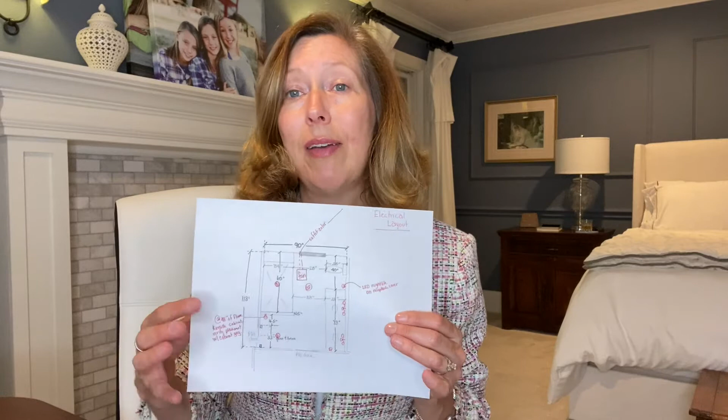I photocopied it so that I have it black and white, and then I took a red marker and I started laying out where I wanted the electric on it. So I'm going to show you this and talk to you more about it so that when you get ready to do your own bathroom remodel, you'll have some things in mind that you maybe want to incorporate or not incorporate. The nice thing about this is twofold, or actually threefold, really.

First, when you want to get a bid from an electrician, you can give them this and they can legitimately give you a bid off of it. They probably do need to see the proximity of the bathroom from your electrical box and what kind of shape your electrical box is in, especially if you're going to add any circuits. But this helps in getting you a more concrete bid for your job.

It also lets them know when they get there and start working exactly what they need to do, so they're not frustrated and they can work much faster. And in the end, it guarantees you what you want. If you don't have something like this, an electrician shows up at your house, they're either going to ask you a million questions or they're going to make decisions for you. They're going to decide where your light fixtures go, where your outlets go, and things of that nature. So if you've thought about it beforehand and you have a strong idea of where you want these things, then something like this is really invaluable to you.

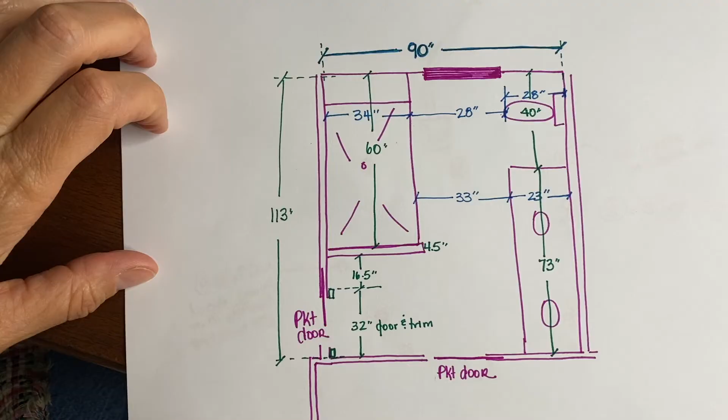So I'm going to pull the camera over my shoulder and show you in great detail so that we can talk about it all. Last week when I talked about how to lay out a bathroom, this is the sketch that we were left with at the end of that exercise. I had drawn out the bathroom, I had placed the vanity, the toilet, and the shower, and talked about having some storage here and the fact that I wanted 2 pocket doors. This one from the master bedroom and this one from the hallway.

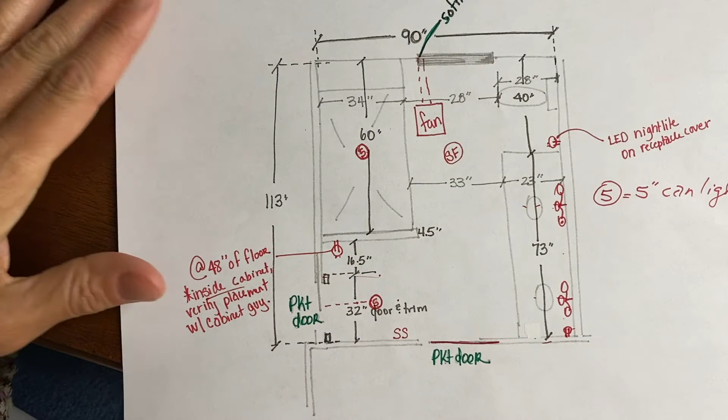So now that I have this, what I do is I take it and I make a black and white photocopy of it. So then I'm left with this. And what I like about this is that the bathroom itself is there, but it sort of fades into the background. And then I use a red marker, and I will also link these in my blog because I love these. They're a medium tip. I can draw some fine information on here, but it doesn't overwhelm.

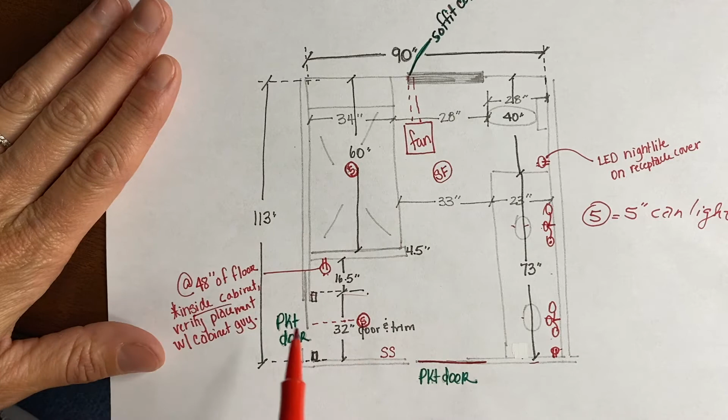But then what I start doing is I take my red marker and I draw my electrical layout. And I really like to think about all the electric, the switches, the receptacles, some people call those outlets or plugs, and the actual lighting. And I draw all of this on here for my electrician. I also put on where there's any pocket doors because electricians have to know about pocket doors. They cannot put any electric switches, outlets, lights, anything on the wall on either side of where there's a pocket door. So it's very important to keep those in mind.

So let's just start with the receptacles. Because there's a pocket door here, I know that I can't put any switches or a receptacle in this space. I should have a few inches here at the very back corner of this vanity where I can snug in a receptacle.

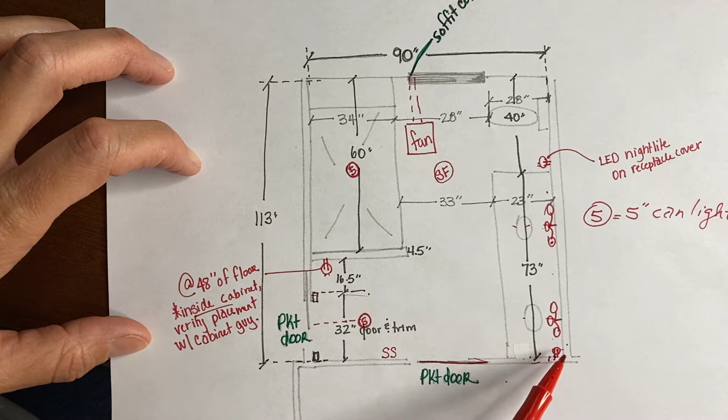The reason that I don't want to put it on this wall is because if we do a big mirror from side to side, which I am a fan of, I don't want the receptacle to interfere with that. So I'm going to tuck it over on the side. I also want one for the person that has this sink, and I'm going to go just off the edge of the vanity and drop it in.

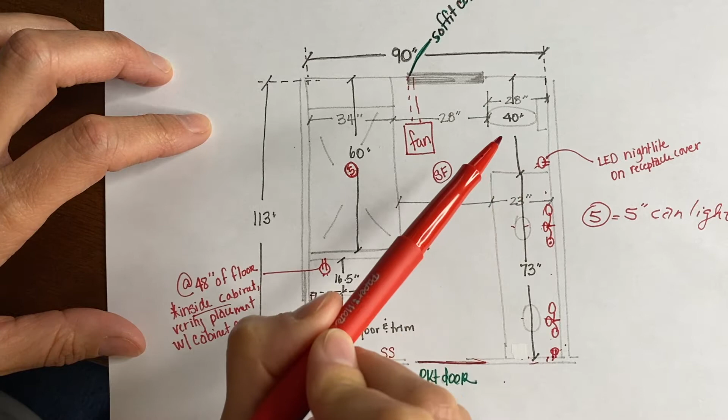And you'll see my notes over here. I have LED nightlight on receptacle cover. So I'm going to link these in the blog also, but I can buy off of Amazon receptacle covers that have a very tiny little photo cell in the corner, and at night when it gets dark it makes an LED light shine out the bottom of the receptacle, and it just gives you a little pool of light here, but it makes it really nice for those nocturnal trips to the restroom. Okay, so that's where those 2 receptacles are going.

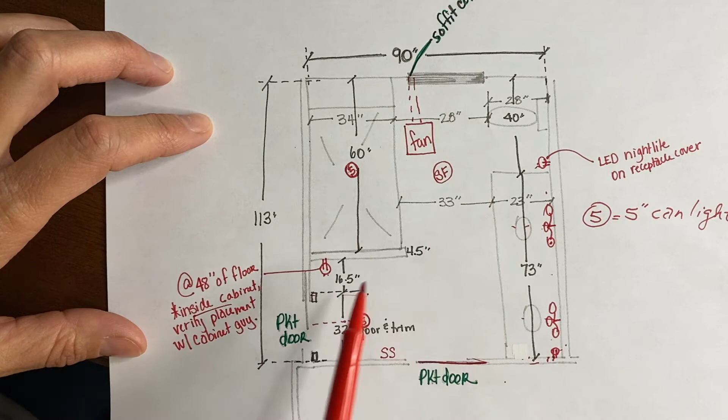The only other place I would put a receptacle in this particular bathroom is actually in this cabinet. I feel like that might be a good place for phones to get charged at night, or charging your toothbrushes if you don't like to leave them out on the counter, or an electric razor. So I'm actually going to install a receptacle inside of this cabinet, and I believe that I want it 48 inches off of the floor.

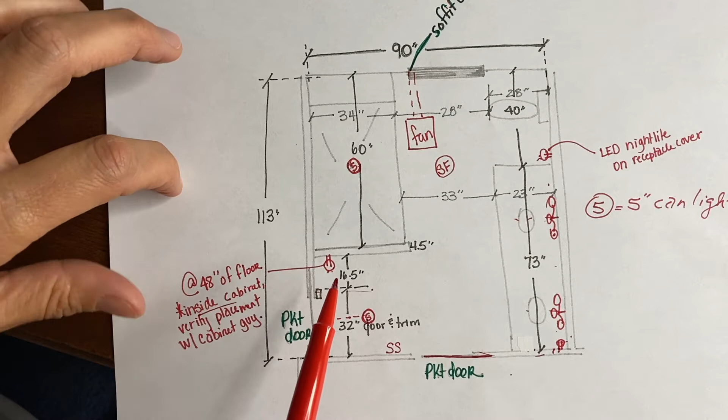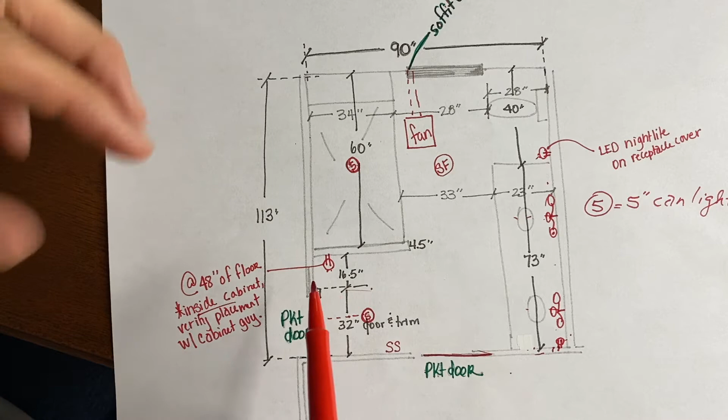I'm going to verify that with my cabinet maker, but it always helps to tell the electrician, because if you just tell them you want a receptacle here, they don't know your grand plan. They don't know that you're going to have a cabinet here and that you want a shelf up high. They're going to drop that down next to the floor where they typically put one, and that's not going to be handy for you. So think through things like that and decide where you want it, but it's nice to tell them how many inches you want it off the floor.

For the lights over the vanity, I also tell them how many inches I want those installed off of the floor. It depends on the height of my ceiling and the height of my mirror and so forth. But there are some standards for that, and I did not pull that up, but I think it's like 67 inches off the floor, but I'll put that in the blog to be sure.

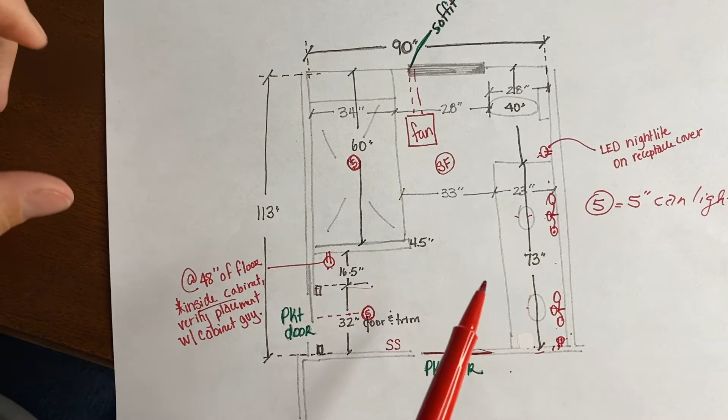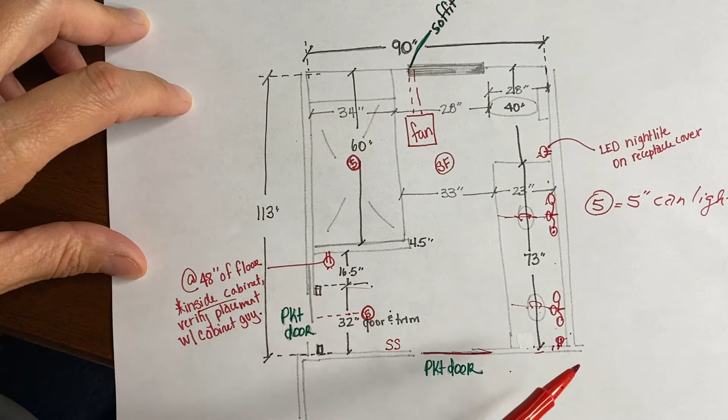So what I am telling the electrician is that I'm going to put up a 3-bulb fixture and that I want it centered on the sink. And you can denote that by drawing a line and putting a C there, and that means in the industry that you want something centered. I've also chosen, wait a minute, let me jump back on the receptacles. So I'm only putting those 3 in the bathroom. That's typically all you need.

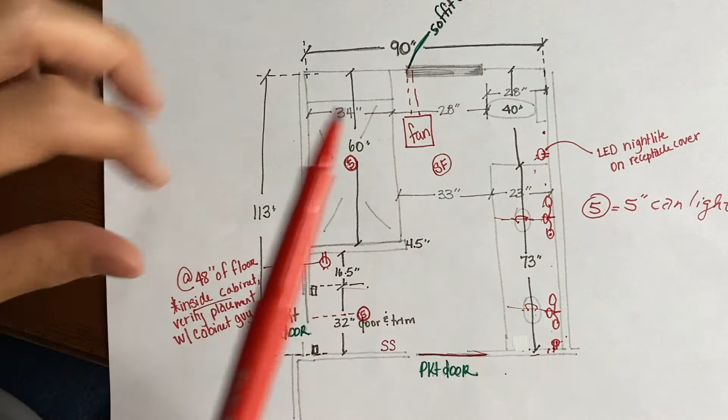However, if you think you might want a bidet, you're going to have to find out about the electric on it. There may need to be a receptacle here. And what I want to say about that is, if you think you're going to do a bidet, you need to know that now, and you need to pick out the one you're going to get now, because it could matter. It could need to be a plug on this side or this side. So you want to get that stuff right early. That's why I'm such a big proponent of planning.

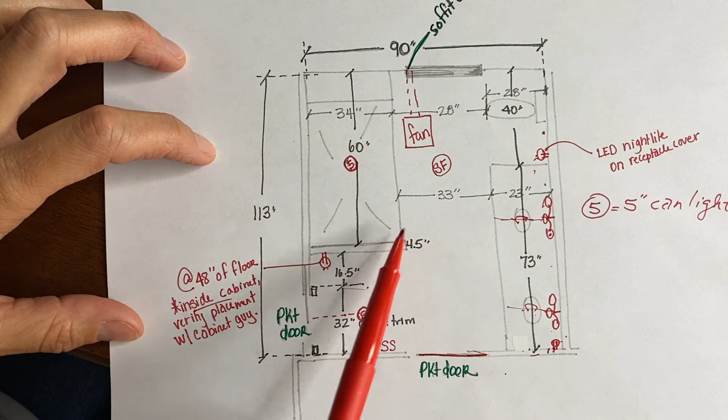Let's see, so I've covered these receptacles, I've covered these lights, can lights. So I really like can lights, I'm a fan of those. I always like to drop one over the shower. Even though the whole front wall of this is glass and you have all of this nice light out here, I still think it's nice for cleaning and for when this gets steamed up, just to have that extra light in the shower. It can't hurt anything, and if you want something like that, this is the time to do it. So I just usually drop one right in the middle of the shower.

And then this little space over here, I feel like could be kind of dark, and where I'm going to have a cabinet here, I want to be able to see in that, so I'm going to drop one can light centered up on this door. That's what this dotted line means, that I wanted this 5-inch can light centered up on this doorway. Also, I have worked with my electrician for a long time, so when I do a 5 with a circle around it, he knows that means I want a 5-inch can there.

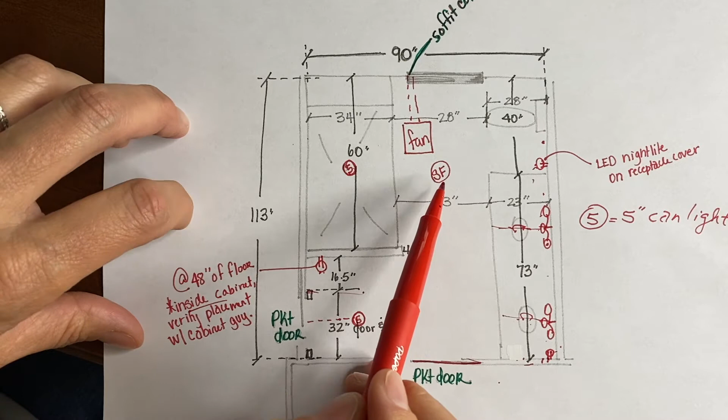But if you're working with somebody that you've never worked with before, they may not get your key, so just do them a little key over here on the side. Do a 5 with a circle and say 5-inch can light. This, for instance, is a semi-flush light that I'd like to have in the ceiling of the bathroom. So I would do an SF with a circle, and I would put an equal mark, and I would say semi-flush, and then your electrician will know exactly what you're talking about.

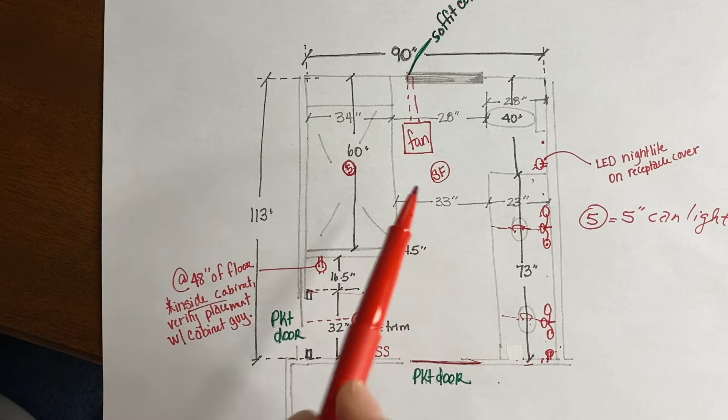And a semi-flush light is one that is very close to the ceiling. It hangs down maybe 6 inches. I don't want to go any further than that in here because they have an 8-foot ceiling, so like a chandelier would not be appropriate. You could also do a flush mount. That would be perfectly fine also. Just depends on what I find when I start shopping for that.

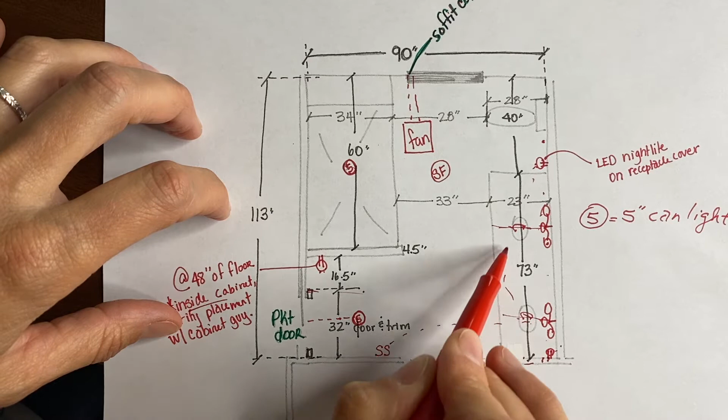Let's see, the last thing that I want to do on here is my switches. So I feel like there needs to be 2 switches in this bathroom. There needs to be one that turns these 2 lights on. So what I would do is I would draw a dotted line to this one, and then to this one. And then this switch, I think, can turn on this can light, and this. I think it's fine for all 3 of those to be on at once.

I mean, you could divide them all up on separate switches, but then what you would get is a whole bunch of switches stacked across here. And if you're like me, you're never going to remember which switch turns on which light, so you have to stand and flip them all on and off. And that's just annoying. Just keep it simple, I think, and just make all of these on one switch.

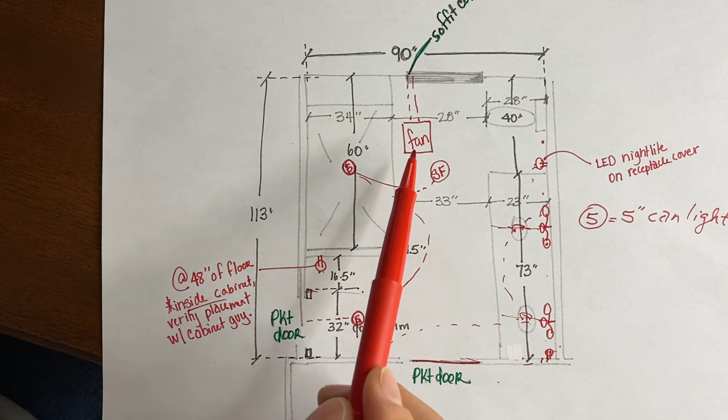My bath fans, I do not put on a switch. I buy the kind that have a humidistat in them and that are sensing, and so they just come on and off as needed. And I can also link to those in the blog post.

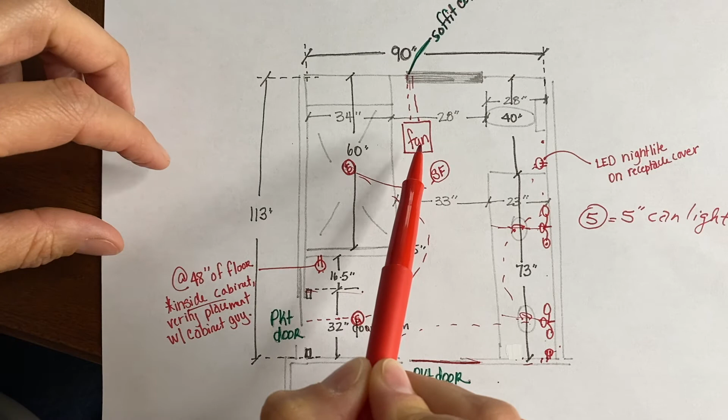And the thing I want you to know about the fan is that the electrician hangs it and wires it, and then the HVAC contractor runs your ventilation from it to the outside. You just want to give them a location of your fan, a general idea of where you want it, because when they actually go in there, there could be a joist running through the middle of this and they need to shift it one way or the other. So those are some things that are important to remember when you're laying this out.

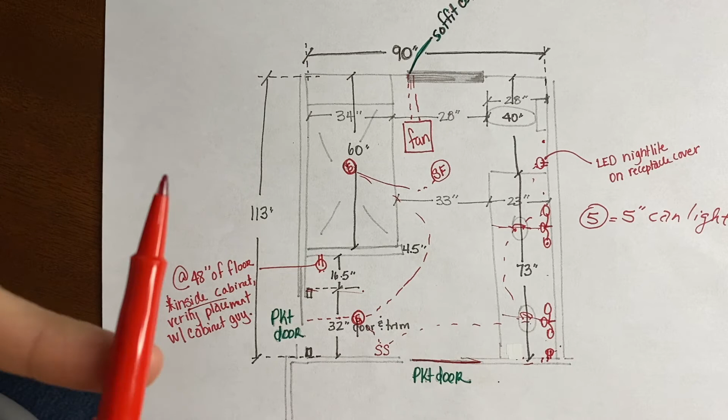The reason that this is such good information is it allows you to get a good bid from an electrician. If he looks at this, he knows what you want and he can give you a really accurate bid. It helps when they come do the work so that they can get in and do it quickly, because they're not stopping to ask you questions. They know exactly what you want and where you want it, and they can do it and move on. And then at the end, it just ensures that you have something that you want.

Like I said, this outlet right here, this receptacle, if you didn't tell them that you wanted 48 inches off the floor, when you got done, it would be down 12 inches off of your floor, and then it wouldn't be useful for you. You'd have to get down in the bottom of that cabinet to plug stuff in. So you know what you need. You just need to do the work to think about it and get it down on paper for the trades.